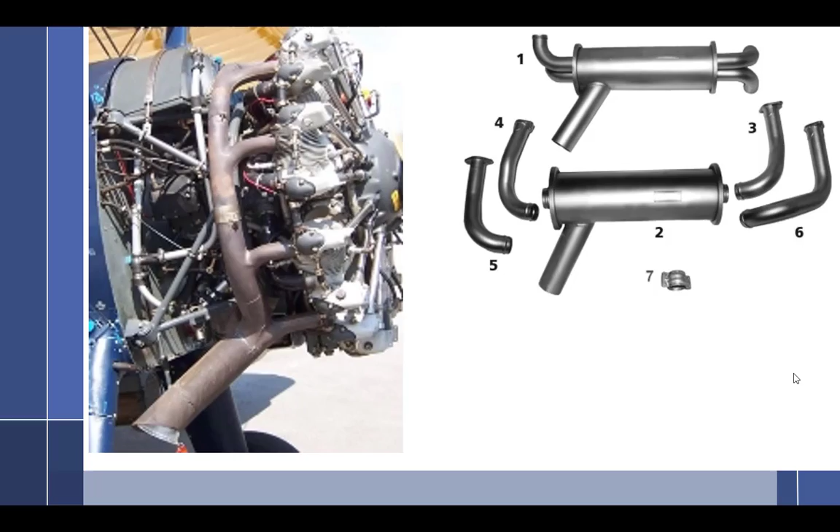All right, we left off yesterday talking about exhaust systems, and the last thing we talked about was that you should inspect external welds and clamping every time the cowling is opened. This is going to become especially true on turbocharged engines. Mostly we've talked about normally aspirated engines, since there's not a lot of back pressure on exhaust systems, so things don't go wrong quite as often because it's free flowing. But when you add a turbocharger, you add back pressure, and that creates all kinds of different problems which we'll talk about. So I said inspect external welds and clamping every time the cowling is open, correct? Okay good, so I'm on the right thing.

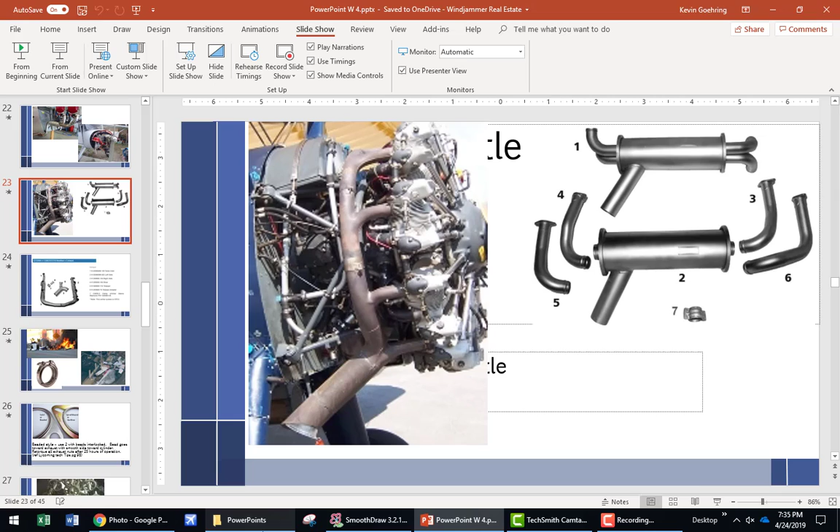All right, so that was a D, so this will be E. E, we want to check also internal baffles. Check internal baffles.

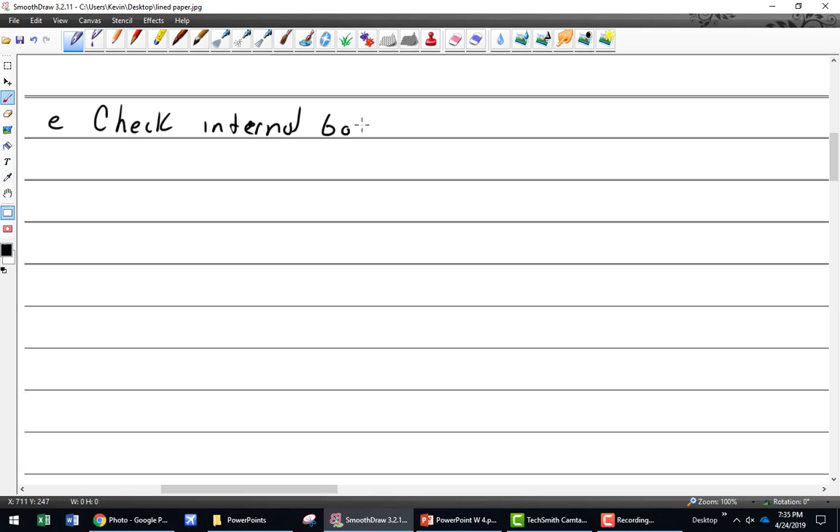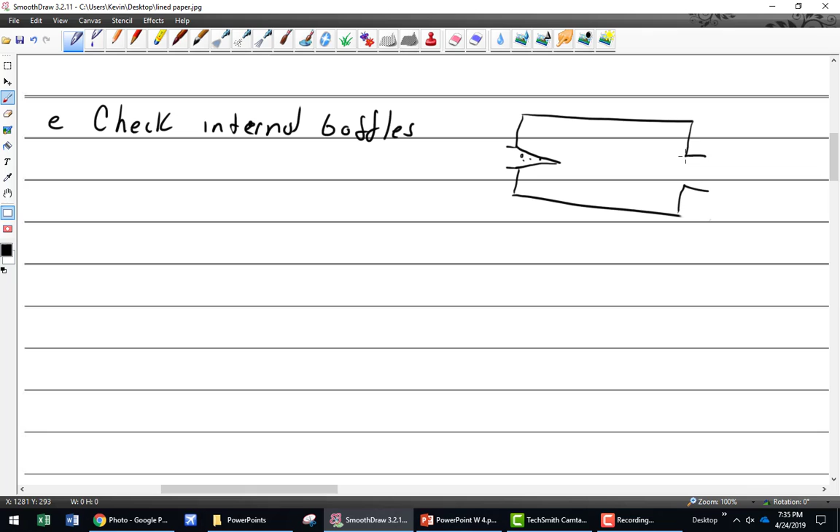So if we kind of looked at the inside of a muffler, I'll make a crude muffler, but at this point that's pretty much all you expect from me, it's some sort of crude drawing. So here we have our muffler, and inside of the muffler sometimes there will be cones with holes drilled in them. I'll make this one bigger. And what that does is it kind of acts as a flame arrestor, so if there's any flames, they may not come out of the muffler system, or it baffles the sound and stuff like that.

But just like with combustion cans for turbine engines, sometimes these things will break off, and pieces will break off and find their way across here and lay across here. And when this gets blocked, as the exhaust comes in and tries to go somewhere, it has nowhere to go, and so the engine dies. This is pretty bad, I would say. So you have to always look up with the flashlight in here, at the mirror, make sure there aren't any pieces floating around in there.

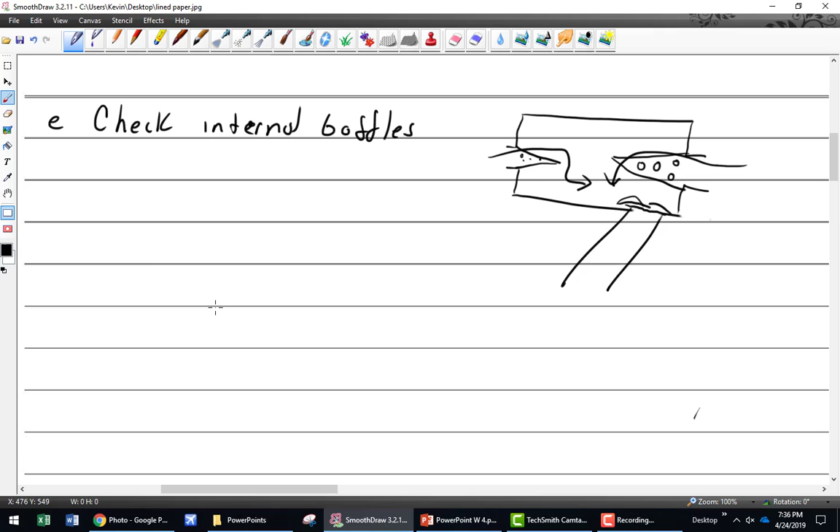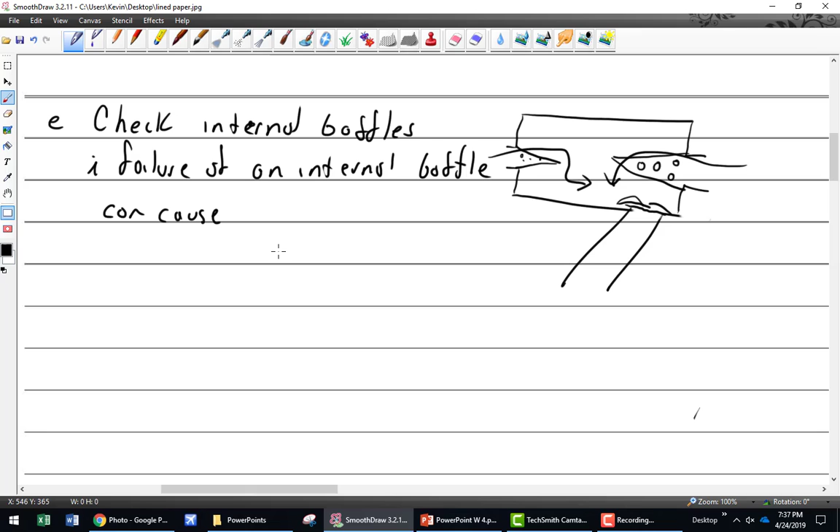So, failure of an internal baffle can cause enough back pressure to stop an engine. Something to always look for.

Something else that I must mention, and by the way, I know I've talked about this before but I really want to push it, is the FAA Awards Program. They have it for both pilots, which is called the Wings Program, and the AMT Awards Program for mechanics. I remember when I applied to be a mechanic examiner, that was the first question on the application, I think it went even before your name. It was like, do you participate in the FAA AMT Awards Program, yes or no? And I don't have statistics, but certainly I've heard that people who are involved in the awards program do much better, they're safer, less accidents. But how many of you guys have tried this? I'm enrolled, I haven't really paid much attention.

So every year the FAA has their big push, and they call it the core course. I'm impressed with the quality of the courses. What they focus in on always seemed to be relevant and important. I think this last year, or the year before, was all about exhaust systems, and that should tell you something. The FAA thought, you know what, that's what we need to focus on this year, of all the things they could focus on, was exhaust systems. Oh, it was one of the great ones. So anyway, I encourage it.

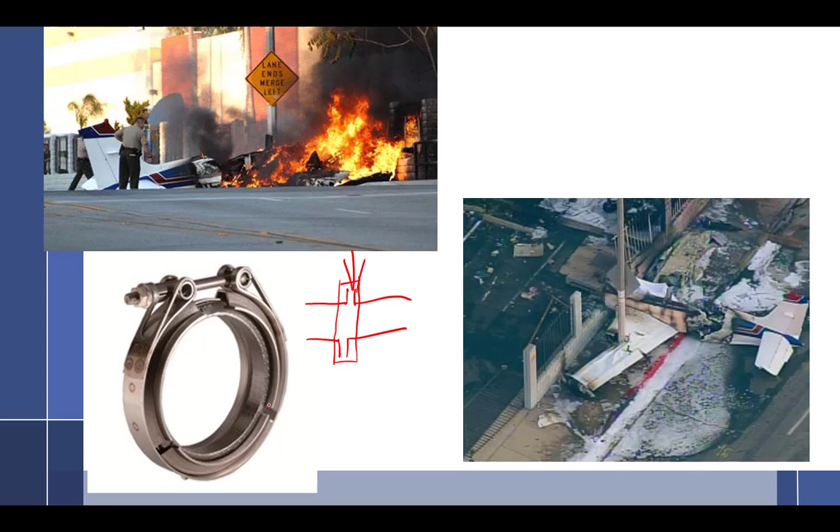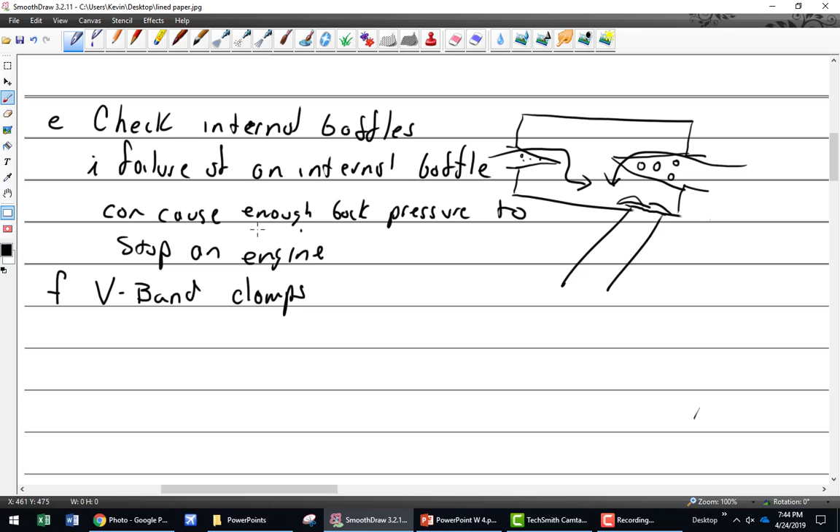All right, V-band clamps—oh, I have a service instruction, so I'll just say use caution. Lycoming service bulletin 1238 Bravo was the last one I read. We won't go into that.

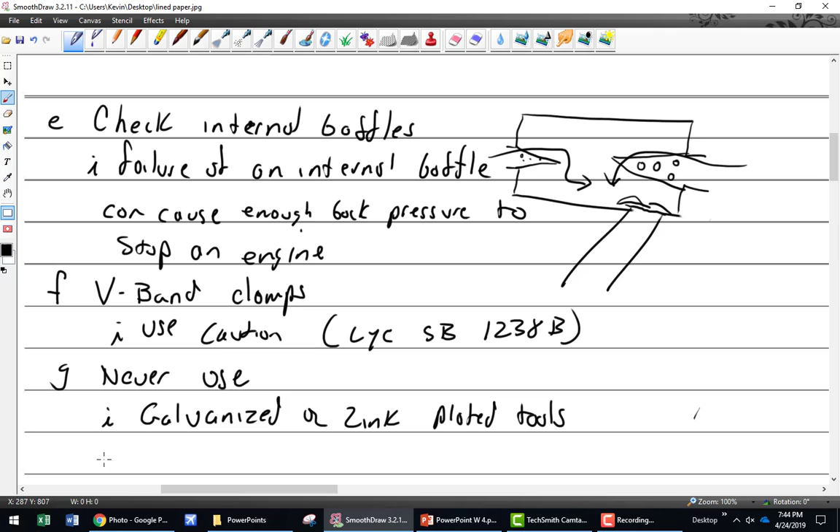Let me see, never use galvanized or zinc-plated tools, or—and I bet you guys know this one—what else would I never write with? What kind of instrument would I never use to write? That's right, lead. Well, we call them lead pencils, but it's really graphite. Why not? Because graphite is actually carbon, and carbon is a hardening agent for metals. So it makes it brittle, like that.

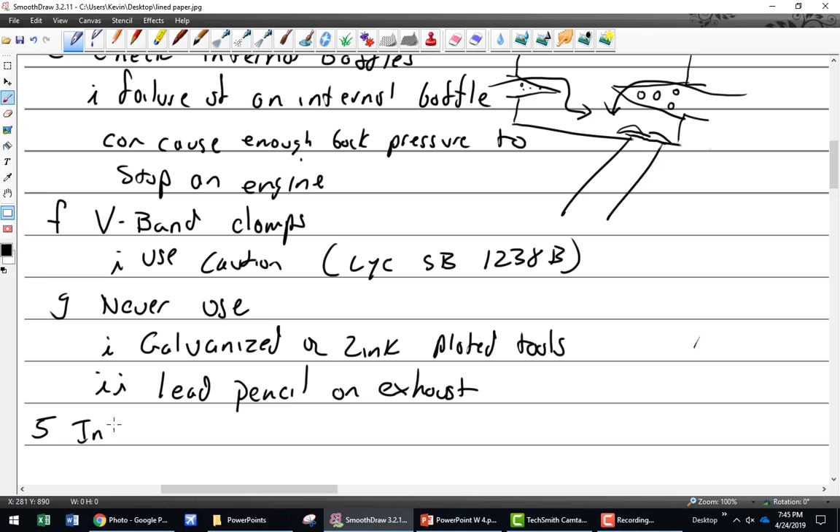All right, installation of exhausts. Well, this is almost cheating to put this, but install per manufacturer.

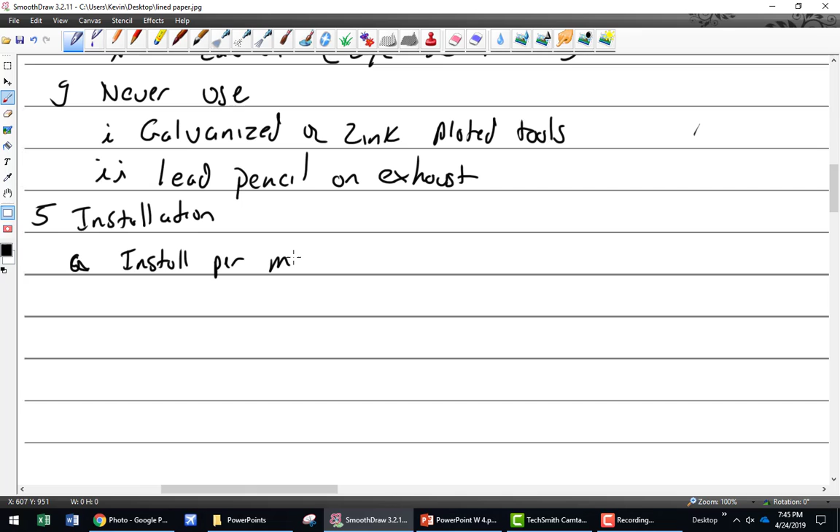Instructions. Where would I find those instructions? You guys have put your engine up on the test stand and installed that exhaust system. How many of you followed the instructions when you did that? I have one guy lying here. And why didn't you follow the instructions? Because with the airframe... That's an airframe item, not an engine item, so it's going to be the airframe instructions. Same reason why you guys didn't know how to put the prop on, because it's part of the airframe.

So those are the kind of things where if you came and asked me, I'd say, oh, this is how you do it. No, first of all, use the manufacturer's instructions. And then use proper gaskets.

And nuts. Let me see. And I just talked about the fact that you want their special nuts. They're not CAD plated, it's too hot. The CAD plating bakes into the base metal, and the base metal gets very brittle. I've taken off many exhaust systems where somebody has done that, and it's amazing. You put the socket up on there, and you go to loosen it, and it sticks, and then it finally pops, and then it kind of just disintegrates. Sometimes it's already disintegrated and not there. That's why you're taking it apart, to change out the gaskets, because you lost some of the studs.

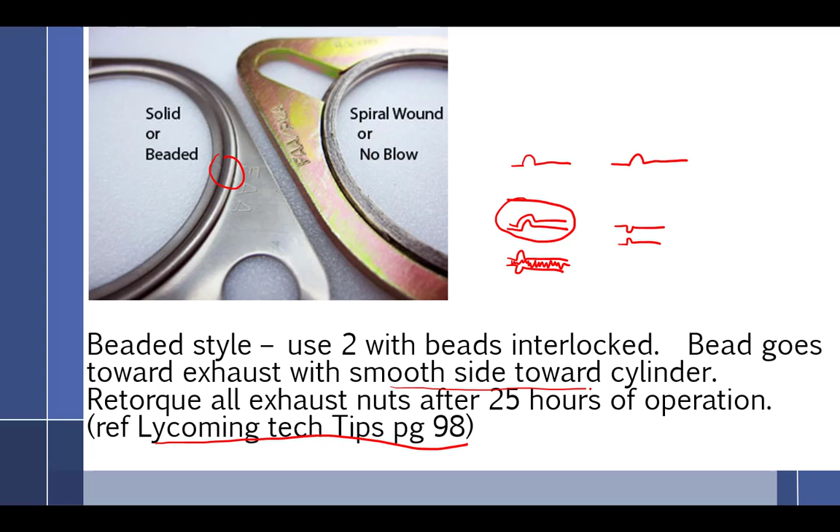Bead goes toward the exhaust, with smooth side toward the cylinder. So smooth side towards the cylinder. You might want to make a note of that, because someday you're going to want to know how to put these on, and just go, oh man, Kevin said something, but I don't want to... I know, I'll go watch the YouTube video.

One of the things I try to remember is, what's the most expensive part, the cylinder or the exhaust? You'd think it would be, so we'll pretend like it is. And so I think the smooth side should go towards the expensive part. Well, if we really stopped and thought about how much an exhaust system is versus one cylinder, then the exhaust would be more expensive. But exhaust versus all of these cylinders, then all the cylinders would be more expensive. So the bead goes down towards the less expensive part, so it'll dig into the less expensive part.

Or you can think about it, cylinders made out of what? Aluminum. And the exhaust is made out of stainless steel, Monel, and so that's harder, so it can take the little bead. I don't know, that's how I think of it. So that's how it goes.

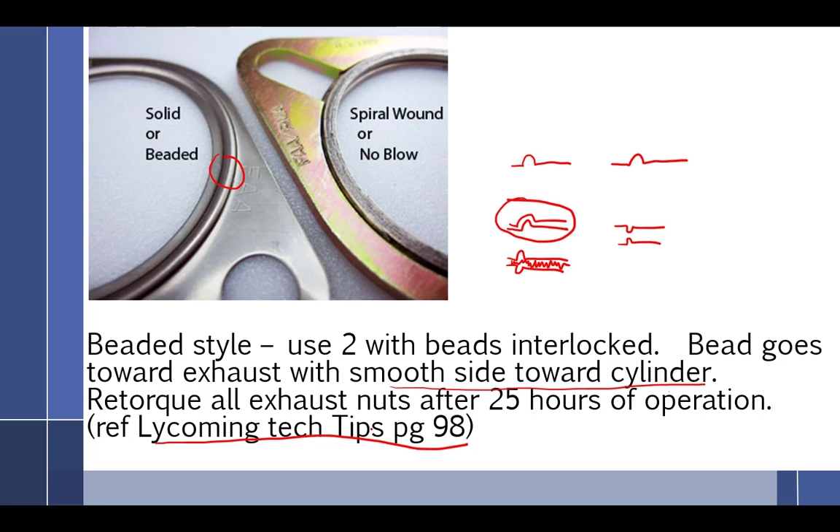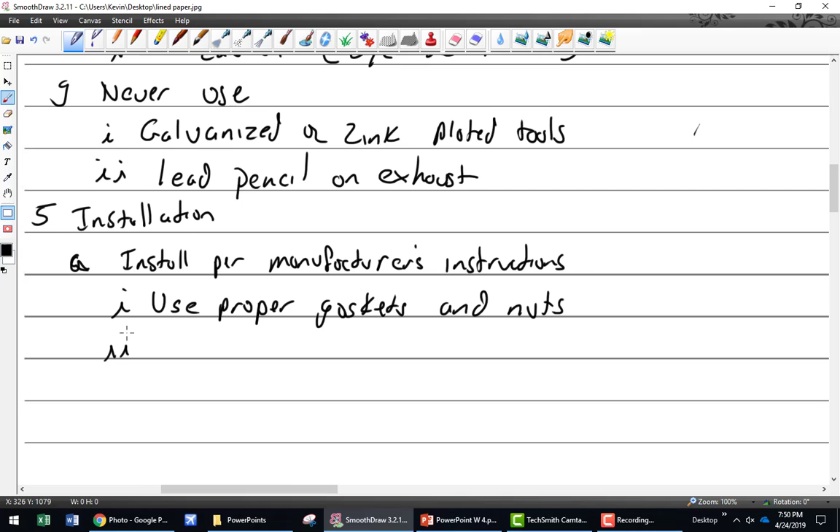Discard. All right, back to here. So use proper gaskets and nuts. Install and operate engine to temperature.

Last year, somebody was running their engine on the stand, and I was doing an oral, and it's a different sound coming through. Something didn't sound right. I could just tell the engine was off. I finally said, I gotta stop, go see what's going on. I walk out, and I'm like, there's something off on your engine. I can't quite place it, but the sound is distinctly different than it should be. So I had them shut down. I look, the exhaust was hanging down about an inch.

Well, there's your problem. All right, so install and operate engine to temp, and then reposition to correct for any leaks.

What's a leak going to look like? Black, or usually in aviation it's gray. It is from the lead. Yep, very gray. And then torque and rerun as needed.

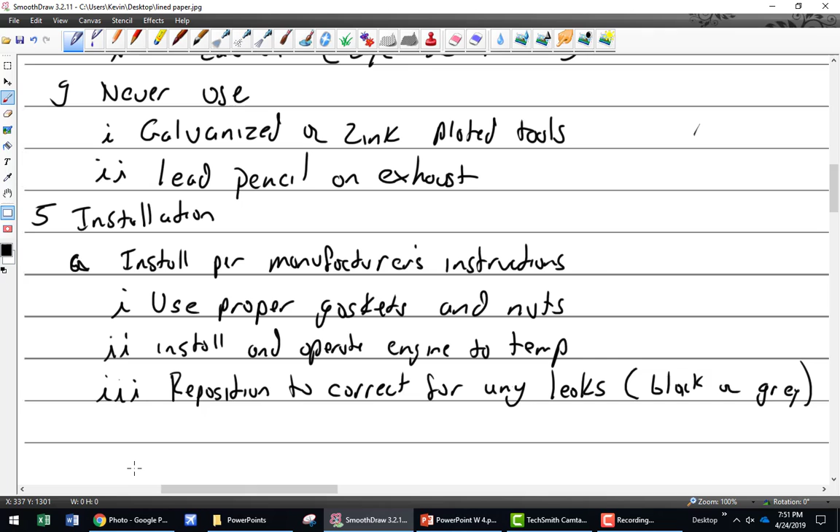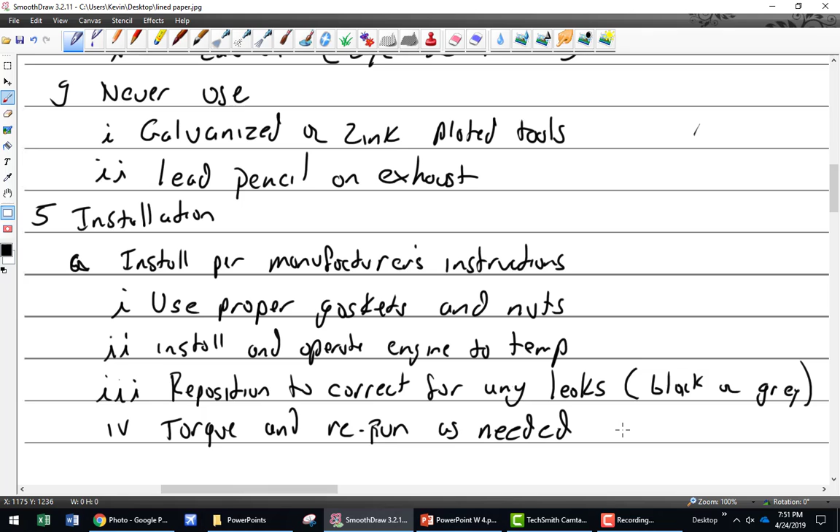So, torque, as needed. All right, that's all I'm going to say about that.

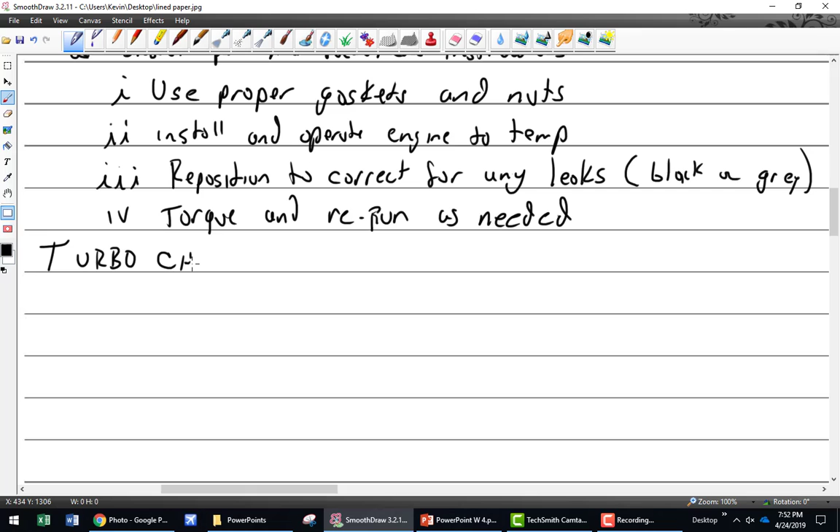Turbocharging and supercharging.

All right, just like a lot of other things in aviation, like the difference between an economizer and a power enrichment, some of the wording gets a little confusing here with turbocharging and supercharging and various other things. So let's define amongst ourselves some unofficial terminology.

So I won't even write it down. So if we're talking about something, we can talk about the same thing and know what we're talking about, all right? So if it's a turbocharger, it has a turbo on it. And we'll define what a turbo is, but that's an exhaust-driven compressor that turbocharges something. And a supercharger is something that is not driven off of exhaust, but rather driven mechanically. So it's a mechanical blower, if you will, or a compressor that's mechanically driven. Got it? So you have turbocharger, supercharger.

The problem comes, and that's universal, right? Everybody, especially in the car world, that's the way it would work. You got a supercharger, if you got a supercharger, it means it's belt driven, all right? But you get into aircraft engines that say they are turbo supercharged, and you're like, whoa, it's got both. It doesn't.

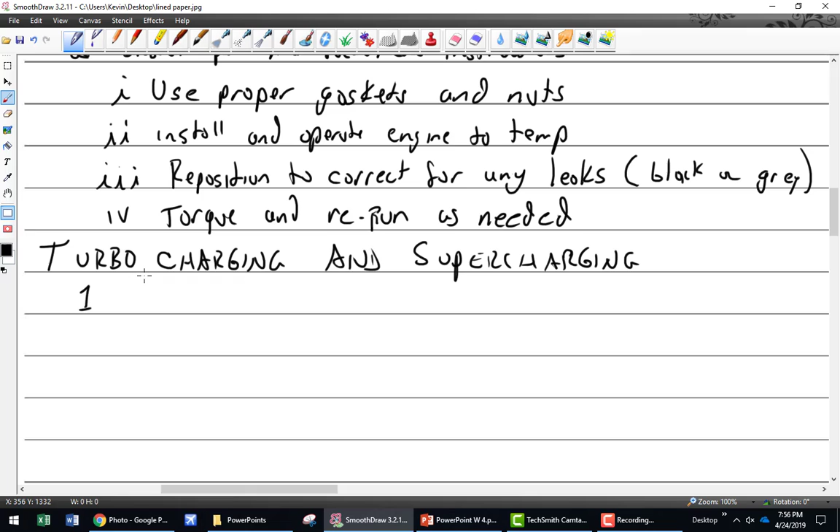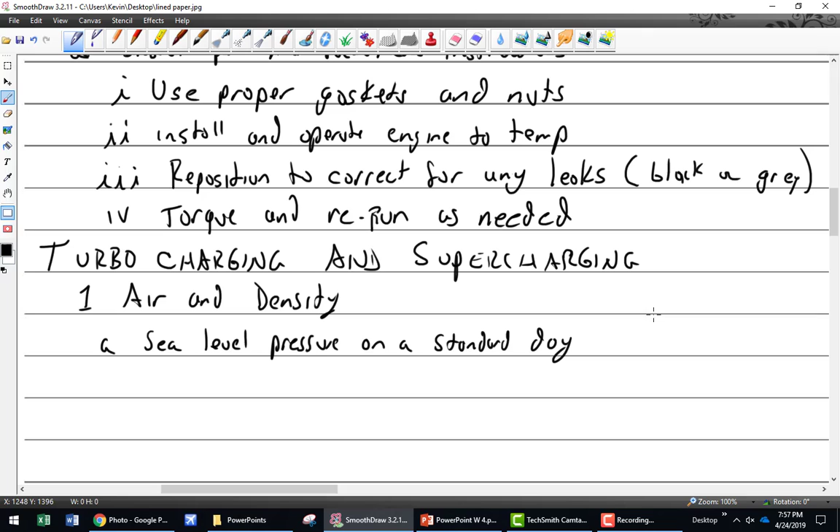Some esoteric one. All right, so as a review - air and density. So at sea level pressure on a standard day, what is it? 29.92. Okay, 29.92 inches of mercury. Or how many psi? 14.7 psi.

Speaking of psi, boy, I sure have a lot of trouble with this one. Nominal - what does nominal mean? Normal? Doesn't mean normal. Ideal? Nah, it's not even that.

The example I've been using in the shop is if I take a 1/2-inch wrench and it's got an opening on one side - if I say what's that opening, well that opening is a 1/2-inch nominal. It means it's about, in this case, about 1/2 inch. If I measured it with a micrometer exactly, would it be a 1/2 inch? Probably not. And if I had a Snap-on and a Mac and a Craftsman and a Husky, they would all be a little different probably, right? But they all say 1/2 inch, so who's right, who's wrong? None of them. It's just a 1/2 inch nominal.

In the same way we talk about that with a bolt - it's a 3/8 inch AN bolt. It's not really 3/8, it's 3/8 nominal. It means that's the ideal size there. So this nominal does not correspond to these two things. It just made me think of that because we're having problems in lab with the 1/2 inch nominal. Everybody goes, well I think it's 1/2 inch normal. It doesn't say normal, it says nominal. Well what does that mean? And so now you know.

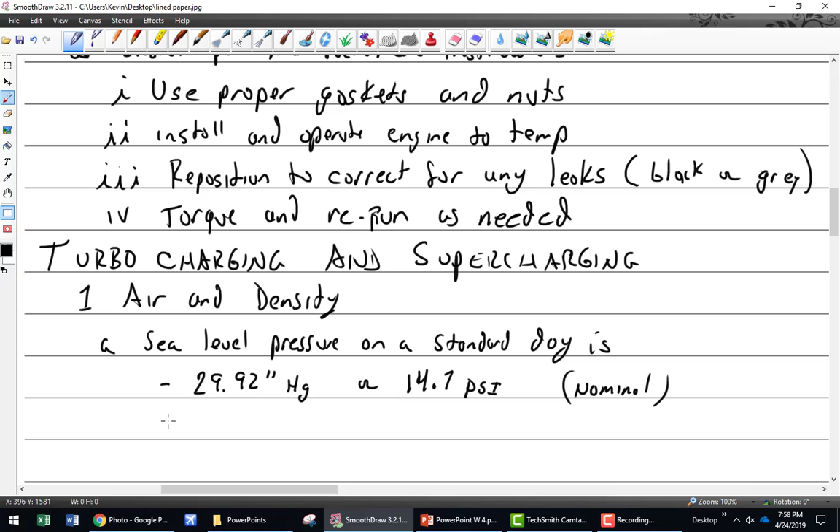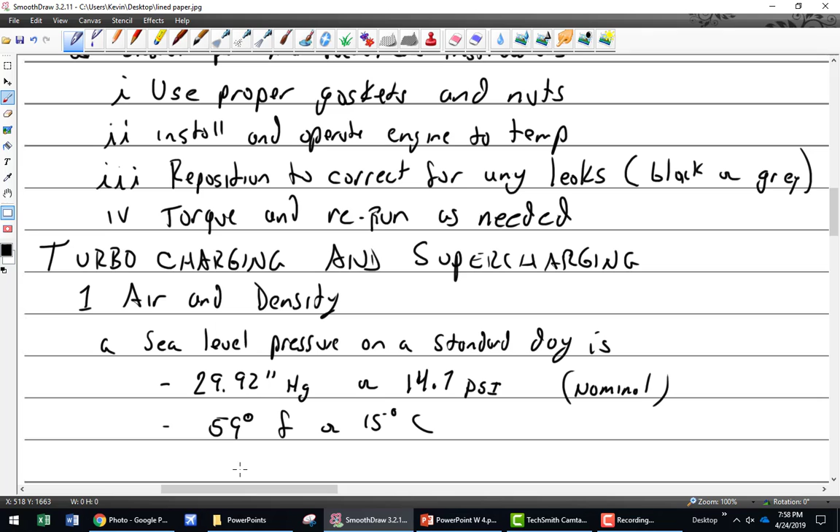So it's okay, let's see. What's temperature? 15 Celsius. Oh come on man, in English. All right, so 29.92, and I will kind of round off to probably 30 inches, but don't let that freak you out. Let's talk about Boyle's law.

And that was named after Boyle. A guy named Jeff Law? No, I don't know - Boyle's law, guy named Boyle. Boyle's law says that any sample of gas, the volume is inversely proportional to the absolute pressure if the temp is kept constant, which is to say that if I have a container and the temperature is kept constant, if I double the container size, what happens to the pressure inside? Half. If I half my container, the pressure doubles. Okay, that's really all that's saying.

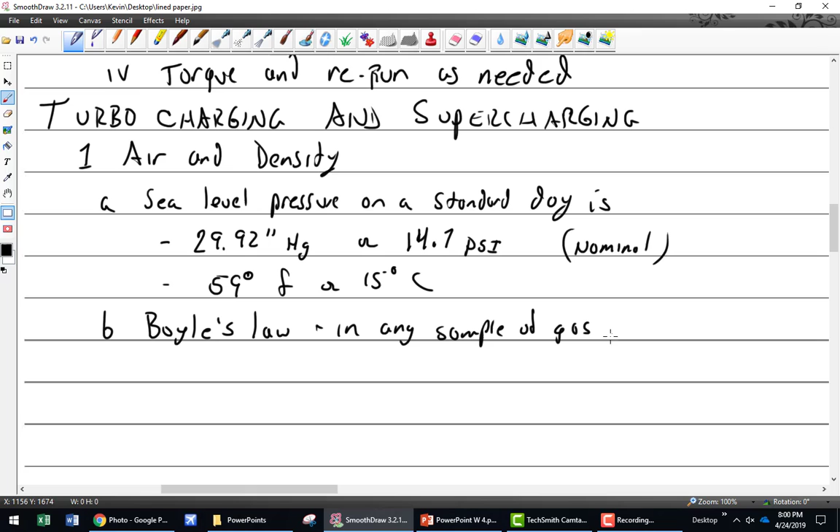So I can write that: in any sample of gas, because I think there's a Q&A question that revolves around this - the volume is inversely proportional to the absolute pressure, if the temp is kept constant. What happens if the temperature is not kept constant? In other words, I increase the temperature - you're going to increase pressure. You increase pressure, there you go.

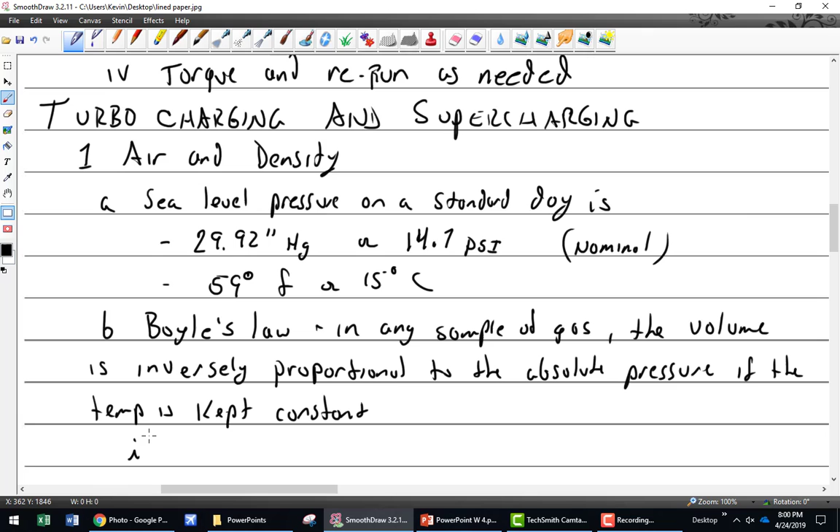All right, let's see. So 13 cubic feet of air at 14.7 pounds, 14.7 psi I mean, PSI, weighs 1 pound. Let me see.

We don't need to memorize this. At 10 psi, you need 19 cubic feet of air to equal a pound, and the same 19 cubic feet of air at 20 psi would be 2 pounds. So in other words, as we increase the pressure, we increase the density of the air. We know that, right? We've kind of been talking about this all along.

And so as we go up in altitude, what happens? It becomes less dense. Okay, it becomes less dense. As altitude increases, pressure and density - increase or decrease? Decrease. All right, thank you.

And as the pressure and the density decrease, we have less air going to the engine, which means we should have less what else going to the engine? Fuel. So we have less air and less fuel, then the horsepower is going to decrease. Okay.

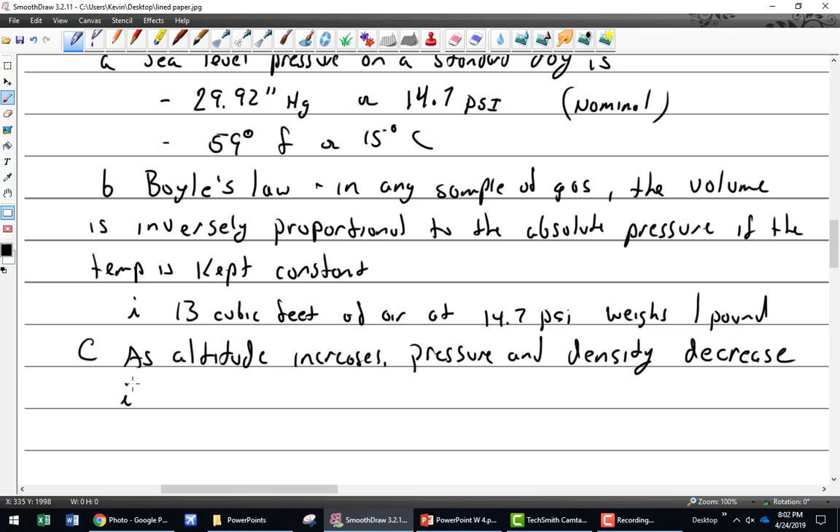I think these numbers are kind of interesting, so I am going to write them down just so you can see. At sea level, that'd be 100%. I think I figured this out from a chart. So Pratt & Whitney 985, that would be a round engine, has 450 horsepower typically. So how many horsepower would be at sea level? 450. Okay, 450 nominal. Nominal, thank you for that.

All right, so at 10,000 feet, we have 75%.

Let's say the air is 75% as thick. So what is my horsepower going to be there? Well, it's 450 times 75%, so we are going to be at 337.5 horsepower. So how many horsepower do we lose? Loss of 112.5. I think that's correct.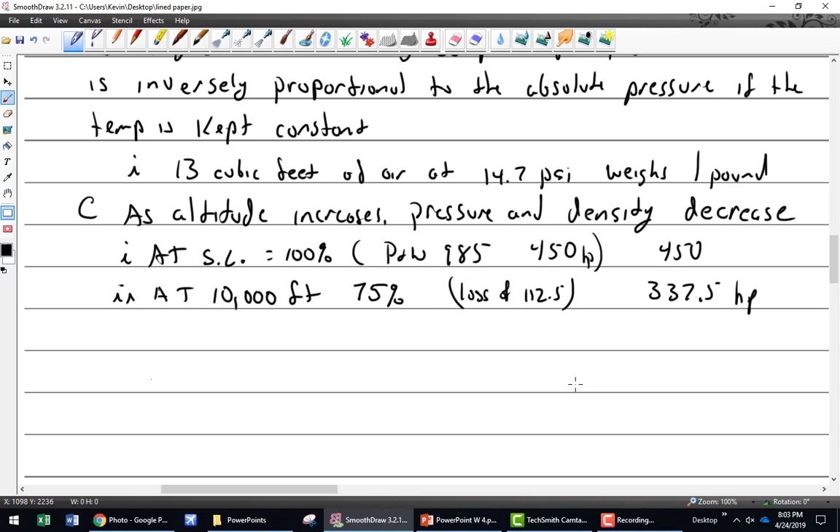Yes, very good. All right, so let's take it up to 20,000 feet. We are now at 50% atmospheric pressure, and that is going to bring us to 225 horsepower. That's a big loss, isn't it?

All right, at 30,000 feet, 30,000 is 33%. We are down to 148 horsepower. At 40,000 feet, we are talking 25% atmosphere. We would be down to 115.5 horsepower. That is a huge loss.

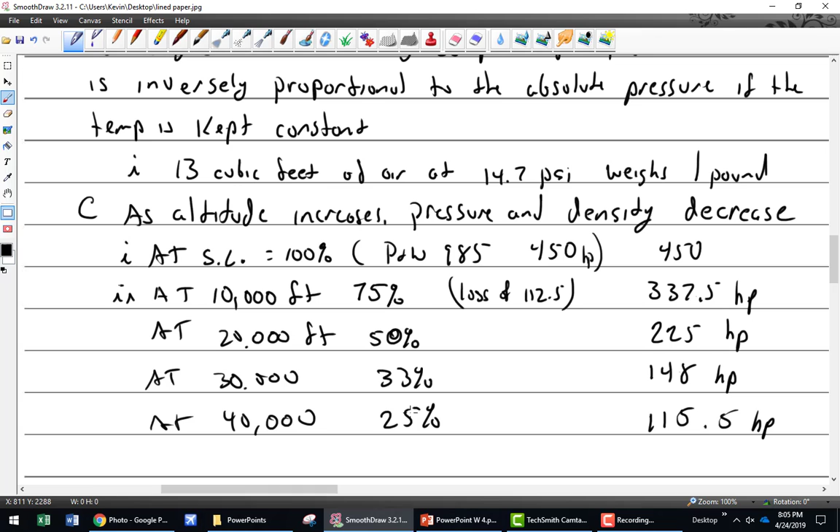There's only one problem with my chart. Prince? Is it not uniform value, like 33 to 25? No, the Pratt & Whitney 985 is supercharged. So it's supercharged, that changes things. I should have you do the supercharged version. There you go.

Just to give you an example, I picked an engine, and this particular engine does have an internal supercharger on it. But anyway, you can see what's happening as you go up in altitude. This engine, or any normally aspirated engine, that 450 horsepower at sea level, by the time I get up to 40,000 feet, it's down to 115 horsepower. That's a significant loss, I would think.

But through the use of turbocharging and supercharging, we can get it back, right? So if I could put a device on it that compressed air, if I had big air compressor tanks that fed the engine, saying here's your 100% sea level air back, we're going to give you 14.7 PSI back, or 30 inches of manifold pressure back. Then if I could go all the way up to 40,000 feet and still give it sea level air, what's my horsepower? 450. So now you can get all this horsepower out of the engine up in the air where it's thinner, and you can go faster.

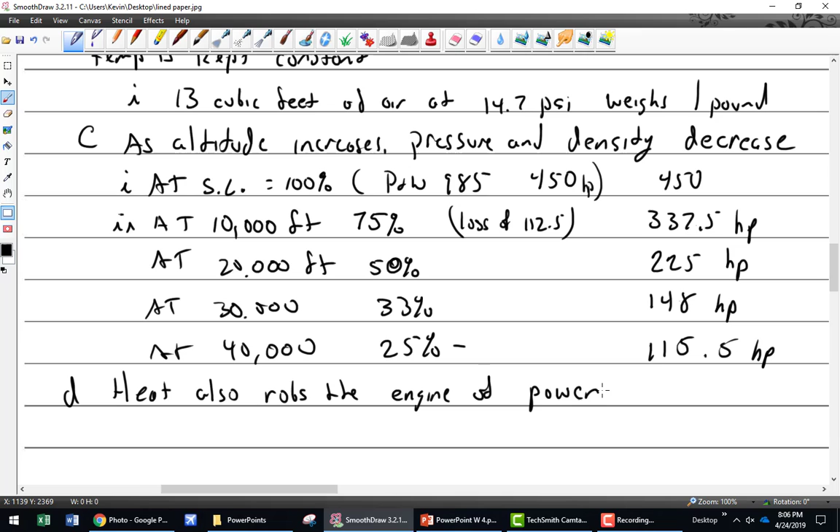All right, so super fast. Well, that's all great in a perfect world. We have to consider something: heat has the opposite effect. Well, I don't want to say opposite, because opposite of what? I didn't really define that. So we'll just say heat also robs the engine of power.

So that brings us to Charles' Law, which basically says if you take a container and raise the temperature of the gas inside of it, then the pressure is going to increase. So, if temperature of a given quantity of gas is raised, and the pressure is held constant, the gas will expand in proportion to the absolute temperature.

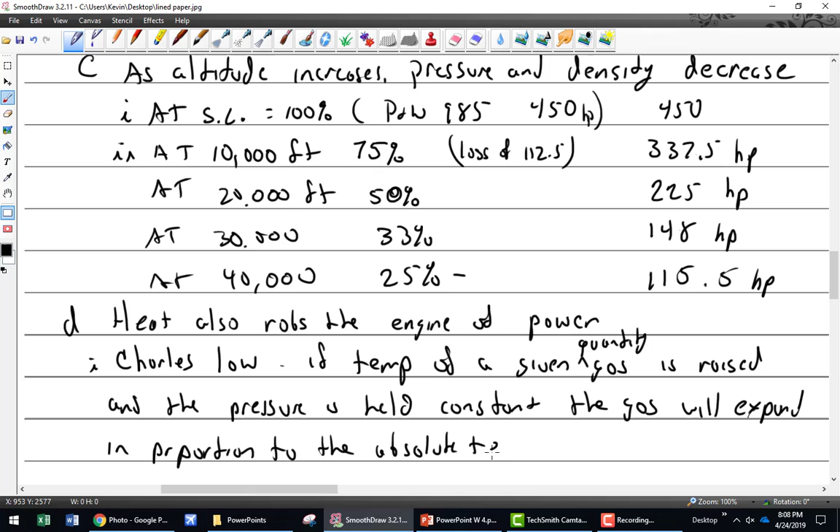Well, now, is that a good thing? I mean, if we think about it, all we have to do is heat up the gas and it's going to expand, and then we have more gas, right? More air going into the engine. No? Well, it sounds like it. Why not? It's the same quantity of air, just more volume.

Because you're absolutely right, you're taking thin air, heating it up, and making it thinner. I can take a pound of air and expand it. How much does it weigh now? Still a pound of air. And so ideally, as air is going through the fuel injection system or our pressure carburetor, does it want to know weight or does it want to know volume? Volume.

It wants to know weight. I always want to know weight. Remember, that was one of the things about an AMC, automatic mixture control, was trying to convert into weight. So you always want weight. It's weight of air to weight of fuel. Does a carburetor measure weight or volume?

Volume. There's our problem, right? If it could measure weight, then it would never get lean as we went up or rich as we went up in altitude, right? But we go up in altitude, we're getting the same volume going through it, but the air weighs less. Follow? So therein lies the problem.

So if we heat up the air that's going into the fuel system, is that going to make it more or less accurate? Less. Is it because I want to measure weight, not volume? So if I have a pound of air that fits this and I heat it up, then it's now this, but it's still a pound. Now that air has got to go through the carburetor, but the carburetor's going to go, whoa, look at all this air coming in. I'll just add enough fuel to make that work. But yet the air didn't weigh enough. So now it's going to run rich.

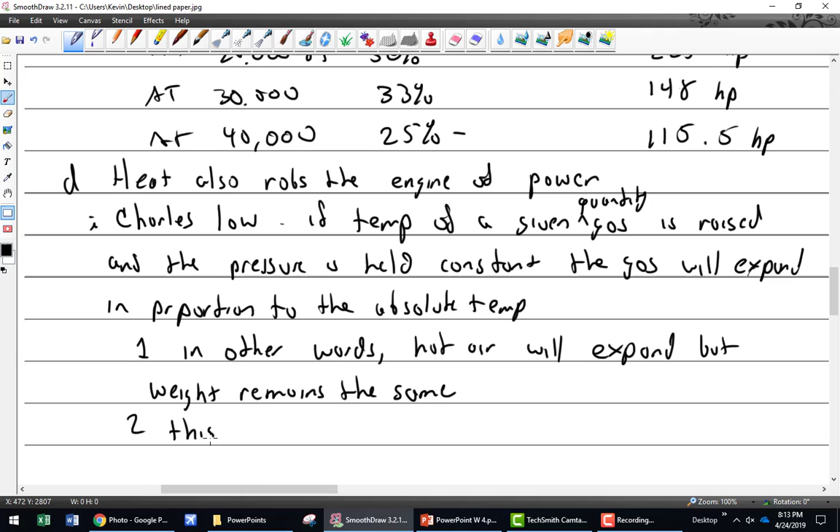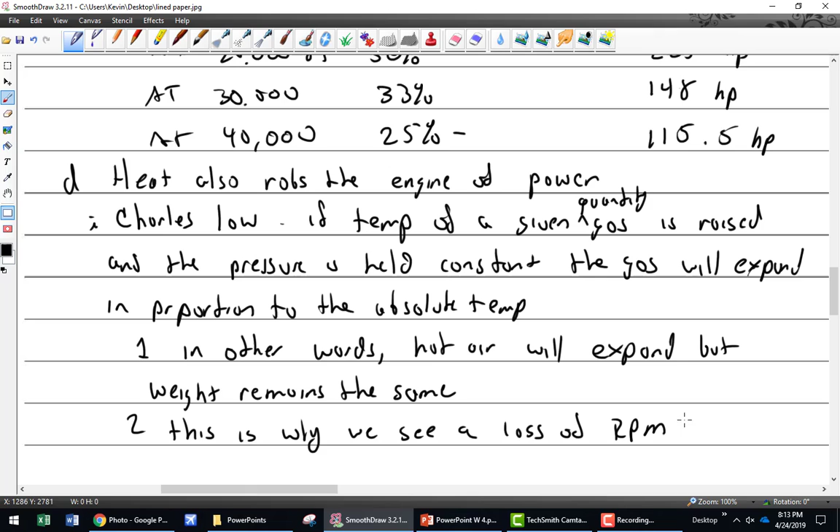Hey, guess what? This is why we see a loss of RPM on a fixed pitch propeller when carb heat is pulled on. I'll say pulled on because you pull on it, right?

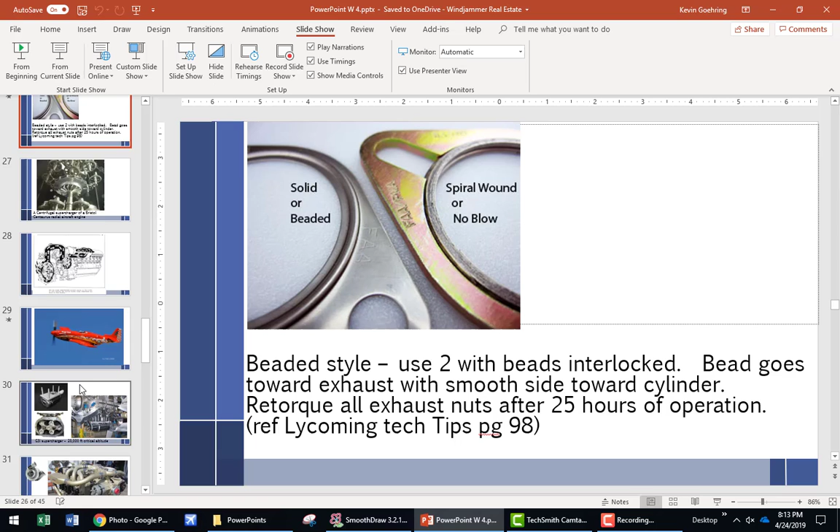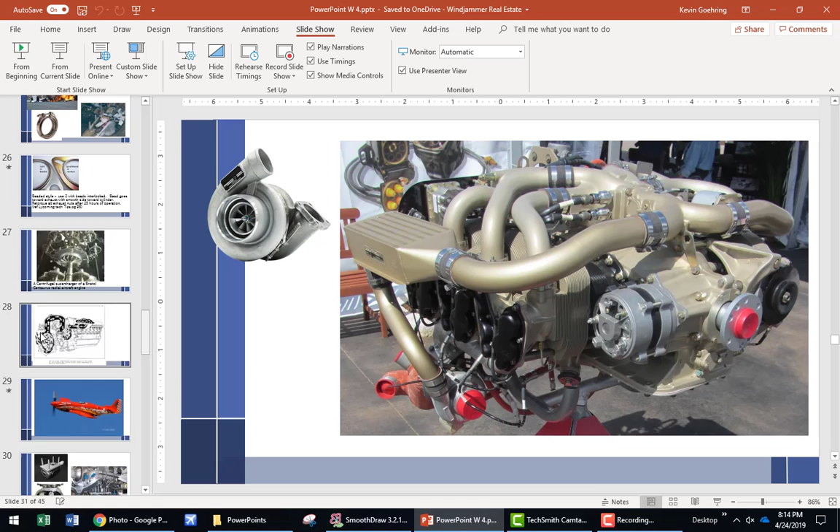Well, it's weight and drag. Not so, well actually, good point. There's actually going to be parasitic drag from the airframe because you have to have air coming in, so it's going to steal air. But it's also going to cause a restriction of airflow through the induction system, which means a drop in manifold pressure. That's simple, you just boost it more, right?

That's also a good thing to a certain extent because you need upper deck pressure for the injectors. So your manifold pressure can't be the same as your upper deck pressure. Yeah, it can, that would be a nice thing. Manifold pressure can't be the same. Yeah, it can, if you have a fuel injected engine, you need a higher pressure for it. No, you need higher pressure than atmospheric.

I thought you needed a higher pressure than your manifold pressure for your air bleed for your injectors. You do need more pressure than the manifold, but you don't need much, like 0.2 psi or something. I don't know the exact number, but you're going to get that usually through the throttle body anyway. Yeah, that adds a lot of restriction.

Okay, so I'm going to ask a weird question. I would expect nothing less. Did I just preface it with 'I have no idea'?

Maximum density of air—what's that? Maximum density of air, like how much you can compress it. What is the maximum, where it becomes incompressible? Somewhere way beyond anywhere that any aircraft could actually operate. Okay, so if you had the ability to get air to, say, absolute zero, and you had one engine that was naturally aspirated, then one with a turbocharger or a supercharger, which would perform better?

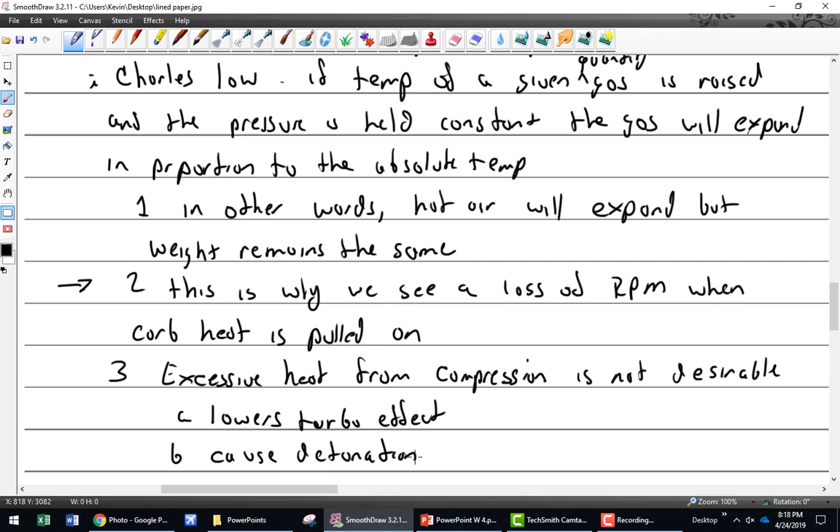So if you had, somehow, a normally aspirated engine seeing 30 inches of manifold pressure versus a turbocharged engine also seeing 30 inches of manifold pressure—but the turbocharged one had to go through a compressor and get compressed, now the air is hot, and you have the back pressure of the exhaust—that's going to be worse than the normally aspirated engine. But those two things don't normally happen, because as soon as you take off you'll start seeing a split. I think that goes back to the question Tyler asked: is there a detriment? Yeah, there is, because you have back pressure and heat.

Let's see, causes detonation—oh here we go: compression causes heat, and if the air is hot enough, 500 degrees, the fuel will ignite. Compression, not from the cylinders, but compression from the turbocharger or the supercharger, causes heat. And if the air is hot enough—and hot enough is 500 degrees Fahrenheit—the fuel will ignite. And that's pretty hot. You don't want that.